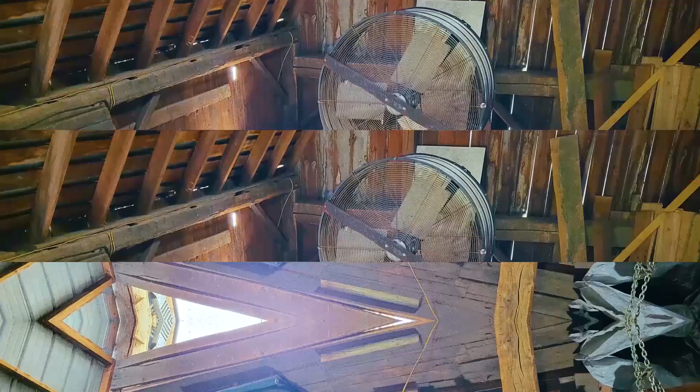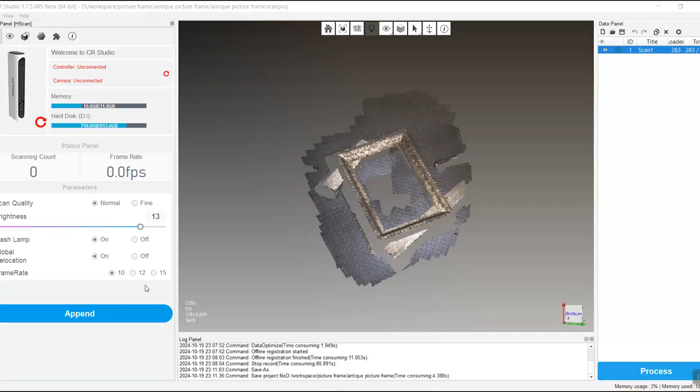We're making an anniversary present for my wife to celebrate our first year since getting married in Vegas. We've been together for 7 years now, and as you can imagine, I've engraved countless images on scraps of wood over the years.

So I wanted to make something special this time around. I've been playing around with this Creality 3D scanner and thought an antique picture frame would be a good intro into modeling CAD surfaces around scan data.

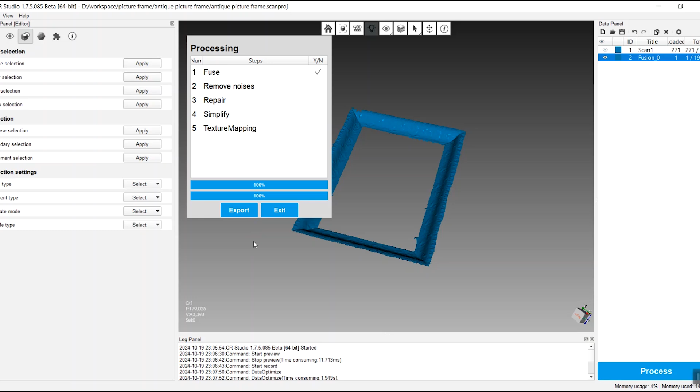Here, I'm using the Creality software to create a mesh before exporting it to Design X.

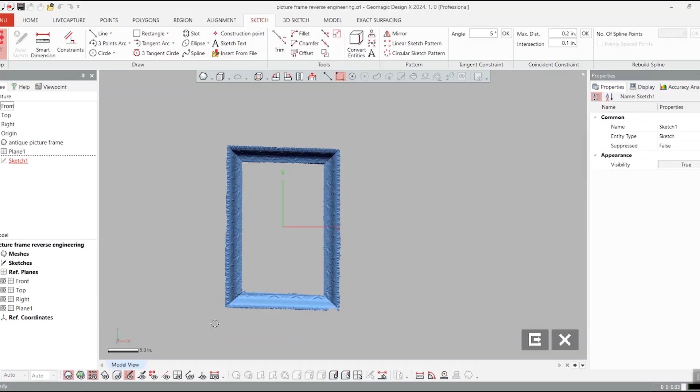Once inside the Geomagic reverse engineering software, I start by aligning my mesh. I messed this up a bit because I didn't leave a flat surface to use as a datum feature.

I continue on figuring out how I'm going to model this, but we will see later the issues the alignment causes in the design.

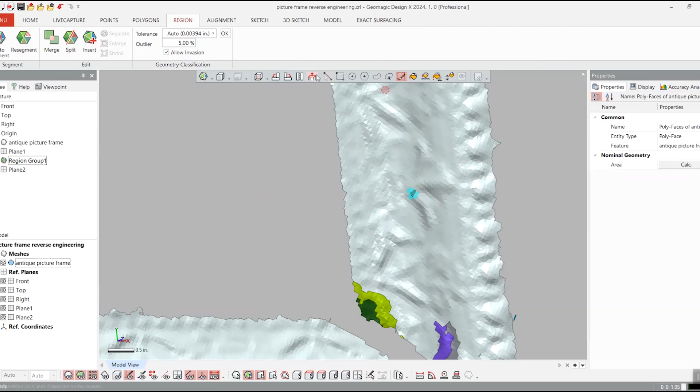I decide to use just one section in the picture frame to get the texture into my design.

After some additional cleanup, I create a CAD surface from the mesh and bring that into SolidWorks.

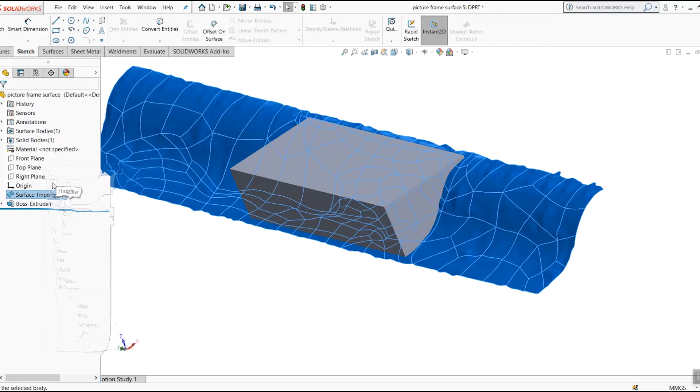Here, I lay the whole project out in a thick slab of ash I had laying around.

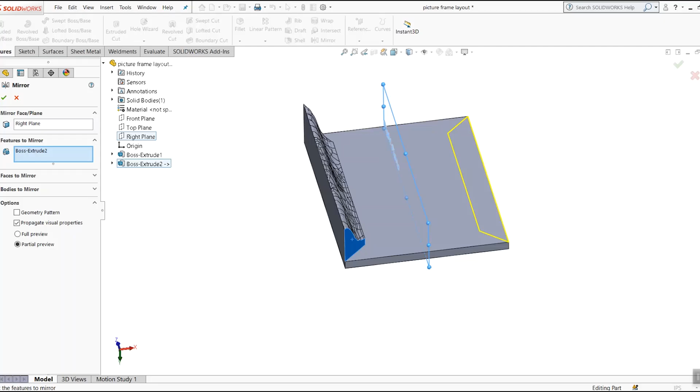After scaling everything around the wedding photo, I decided to do an extrude up to surface for the textured frame. I mirrored the extrusion and then aligned the scan data along the other axis to do the same thing.

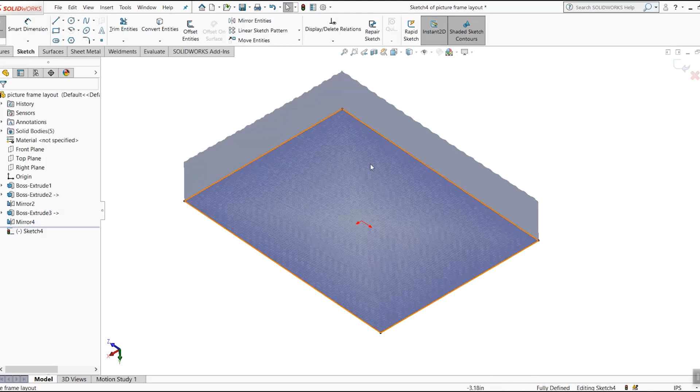This is when I realized the alignment was off significantly because the ends of the scan data didn't come together quite right. I tried to do some fixing, but in the end, I just blended everything together with fillets.

I figured I would lose a lot of detail machining this with a half-inch ball end mill anyway, so it was worth the trial to continue going forward.

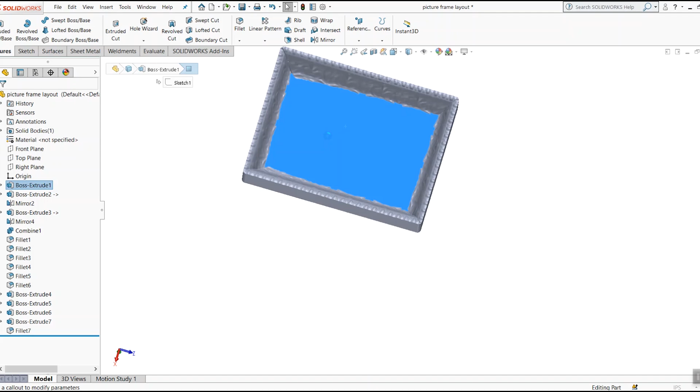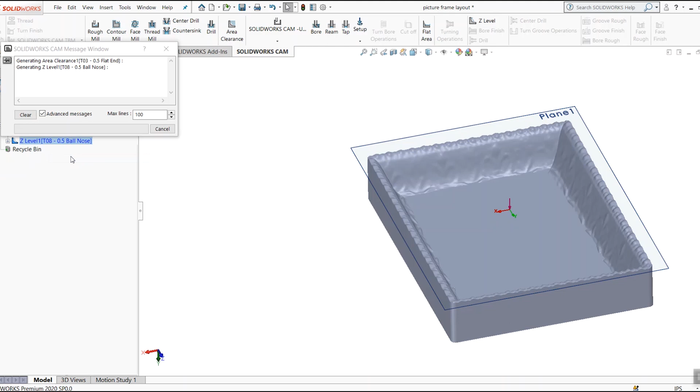I then began the CAM programming. I started by roughing it out with a half-inch flat end mill and finished by surfacing with the half-inch ball.

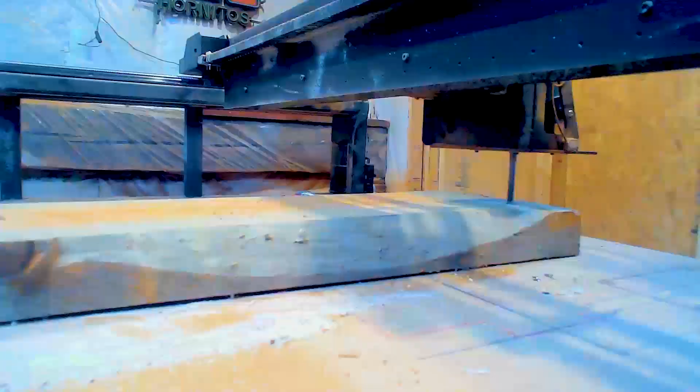Once the simulations looked good, I fired up the CNC and turned this dream into reality.

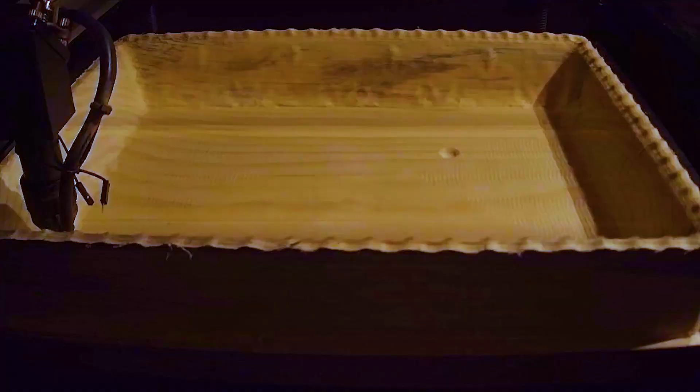I then did some editing of the wedding photo before laser engraving it into the frame. I mostly just adjusted the brightness and contrast and turned it into a stipple image.

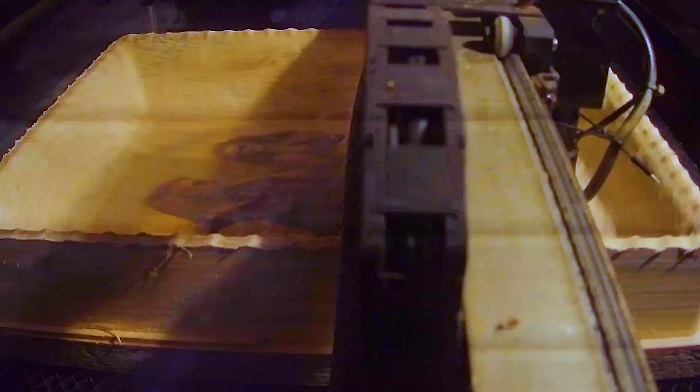Since you don't have colors to work with, you need to have fairly simple images for this to turn out well. I then came back in and engraved the wedding date.

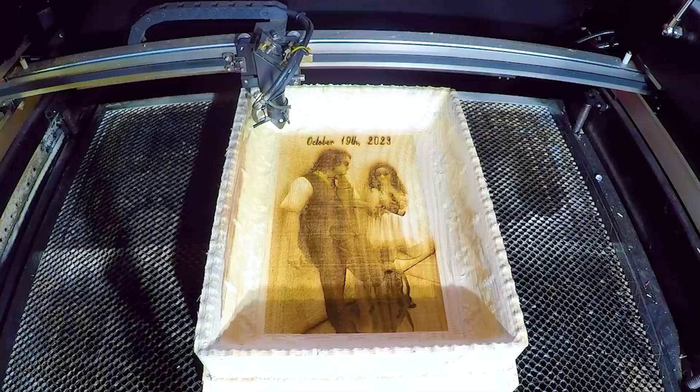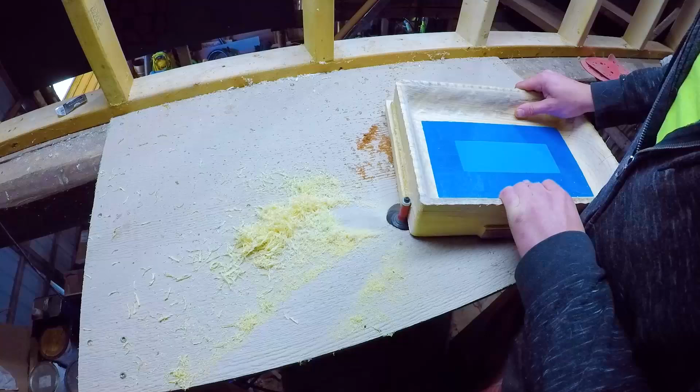With the engraving complete, I covered it with tape for protection while I finished the frame. I picked up a half-inch flush trim bit to finish this off, and here you can really see a demonstration of how much tougher the end grain is versus the sides.

I used a roundover bit on the backside to help remove some of the excess material.

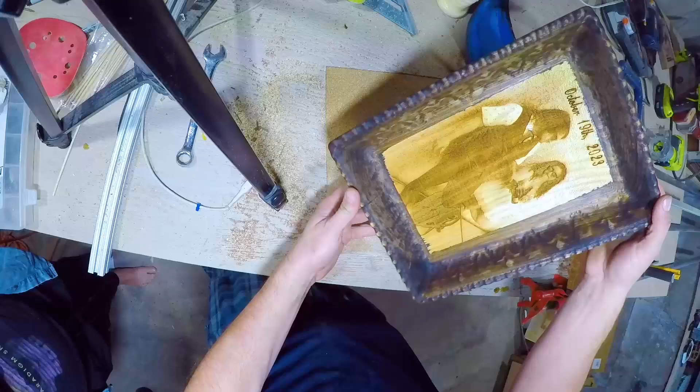I applied some stain to help accentuate the detail in the frame and lightly sanded off some of the overburn from the laser.

I added some additional stain to complete the vintage look before finishing the entire thing with a few coats of polycrylic.